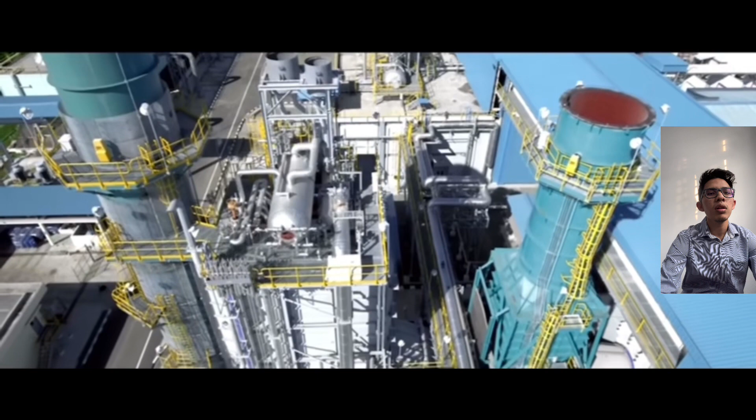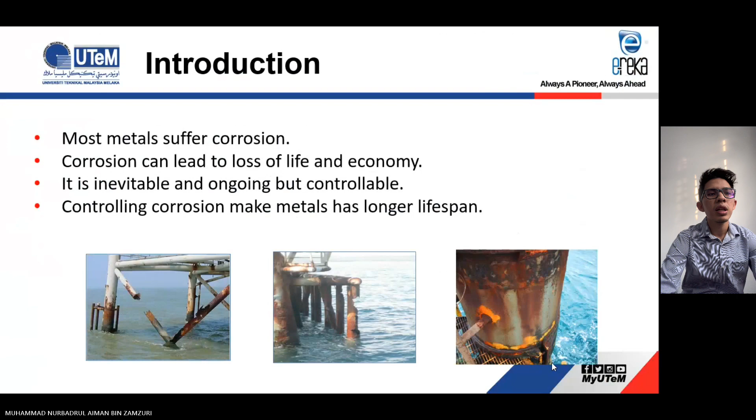At first, we will have a look on the introduction. Most metals suffer corrosion that can lead to loss of life and economy. It is inevitable and ongoing but controllable. By controlling corrosion, we can give metals a longer lifespan and reduce the loss.

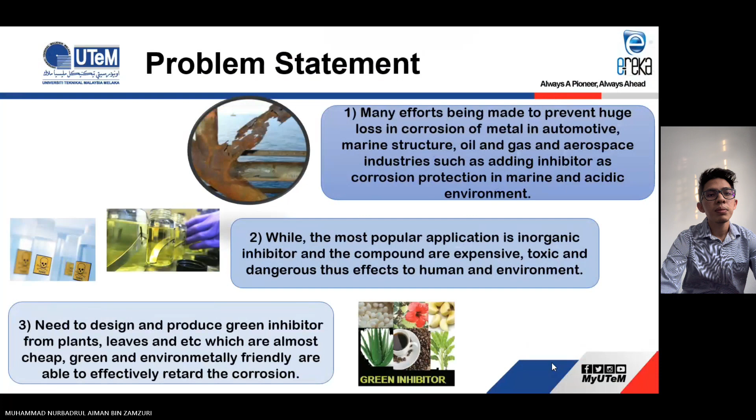These are the problem statements that led to the emergence of this innovation idea: many efforts are being made to prevent huge losses from corrosion of metals in automotive, marine structure, oil and gas, and aerospace industries, such as adding inhibitors as corrosion protection in marine and acidic environments. Besides, the most popular application is inorganic inhibitor, and the compounds are expensive, toxic, and dangerous, thus affecting human and environment. So we need to design and produce a green inhibitor from plants, leaves, or others, which are cheap, green, environmentally friendly, and able to effectively retard corrosion.

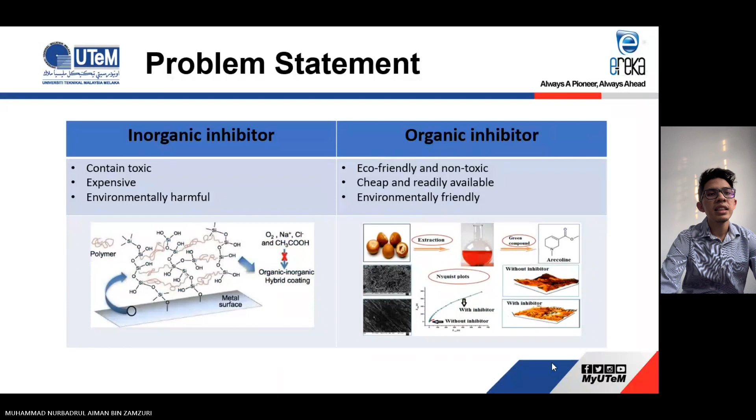These are the comparisons between inorganic inhibitor and organic inhibitor. The inorganic inhibitor contains toxic, expensive, and environmentally harmful elements, while organic inhibitor is an eco-friendly and non-toxic product. Moreover, it is cheap, readily available, and also environmentally friendly.

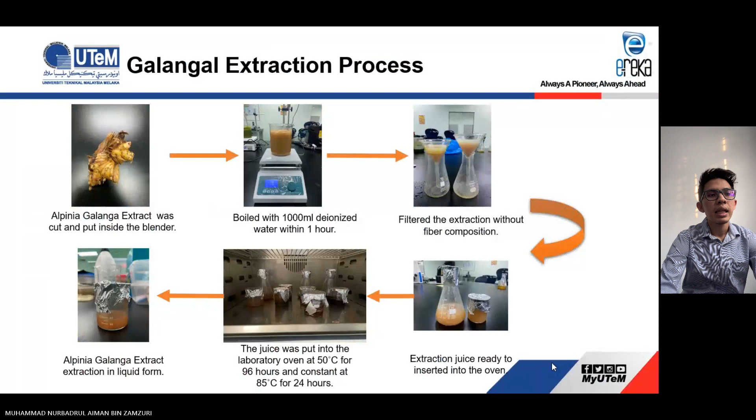For the extraction process, first the Alpinia Galanga extract was cut and put inside the blender. Then it was boiled with a liter of deionized water for an hour. After that, the extraction was filtered without composition before being inserted into the oven at 50 degrees Celsius for 96 hours, and constant at 85 degrees Celsius for 24 hours. At last, we obtain Alpinia Galanga extract in liquid form.

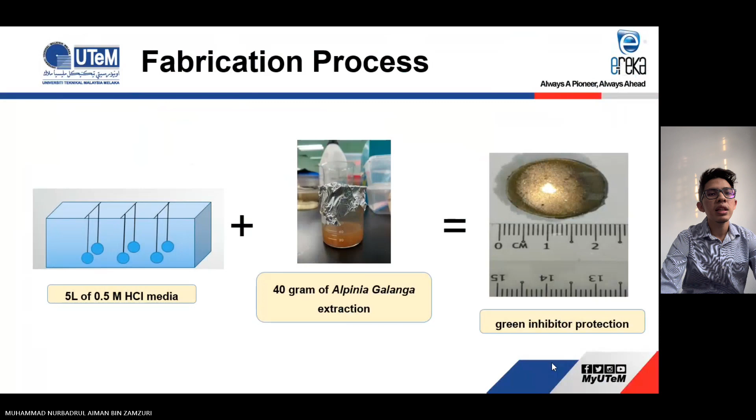For the fabrication process, to produce a layer of green inhibitor protection, 5 liters of 0.5 molar hydrochloric acid media is mixed with 40 grams of Alpinia Galanga extraction. This gives us a green inhibitor protection on the low carbon steel. Our product comes out with 3 novelties: green materials and safety, acting as a barrier coating, and corrosion behavior and cost.

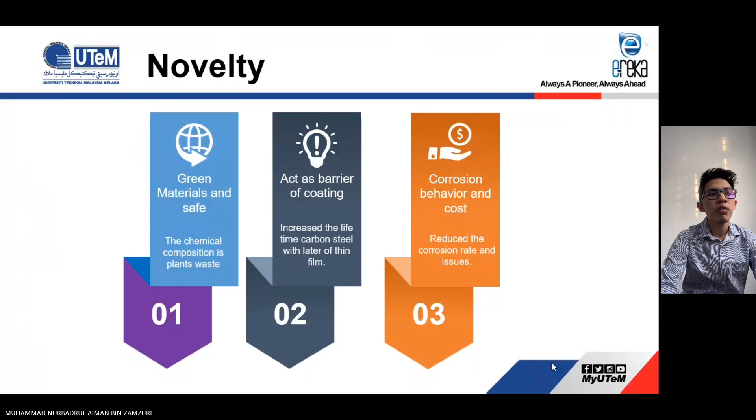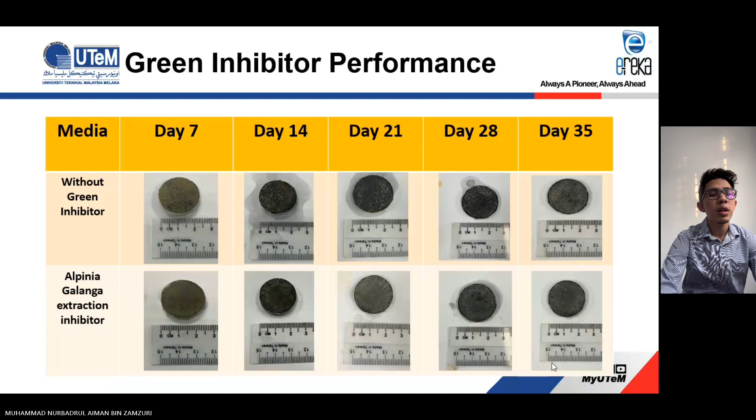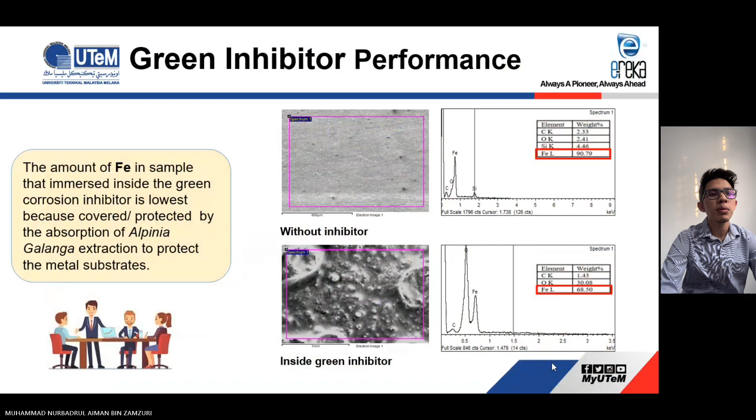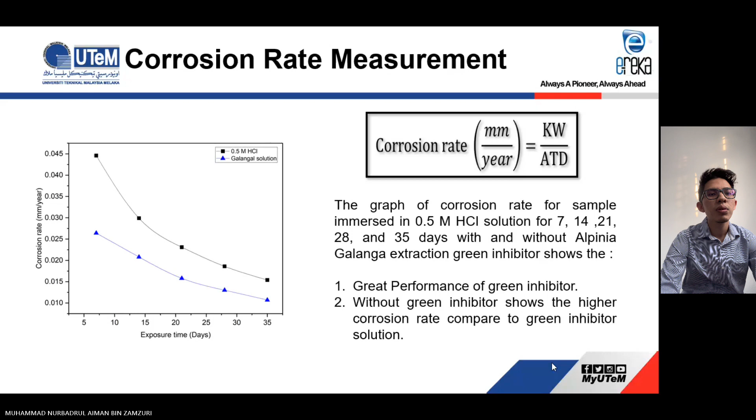Next, for the corrosion rate measurement, the obtained data shows great performance of the green inhibitor, while without inhibitor shows higher corrosion rate compared to the green inhibitor solution.

This infographic shows the evaluation of Alpinia Galanga extract as an eco-friendly corrosion inhibitor for carbon steel in 0.5 molar hydrochloric acid medium. At first, we turn the solid galanga into its solvent and extract. Then we run the FTIR analysis to get information on the chemical compound. Next, we run the immersion test to get comparison results in terms of weight loss measurement and corrosion rate measurement. At last, we run SEM and EDX analysis to do the surface study.

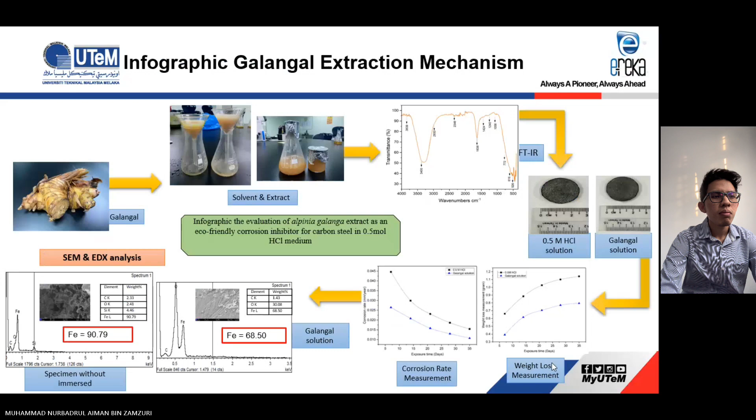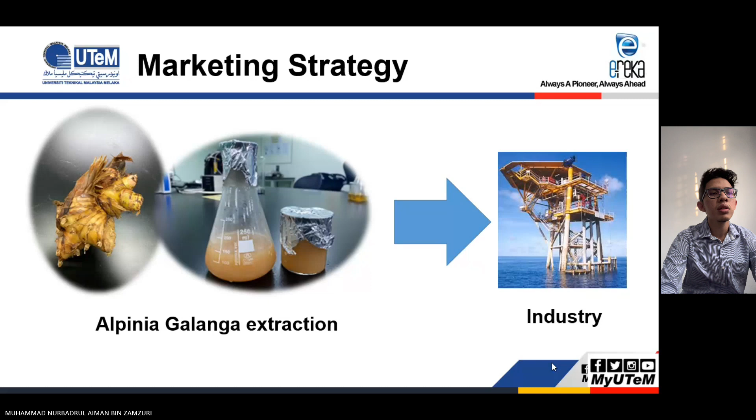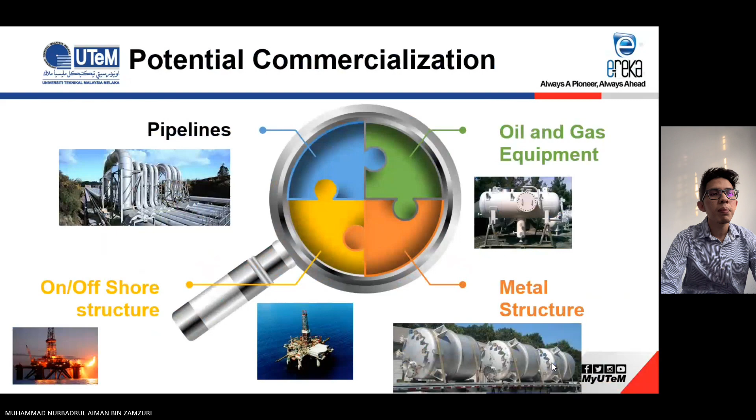For the marketing strategy, we have planned to bring the use of this green inhibitor to the industry by identifying potential commercialization. The potential commercialization of this Bahan Perencat Hijau, particularly in the oil and gas industry, covers pipelines, oil and gas equipment, onshore and offshore structures, and metal structures.

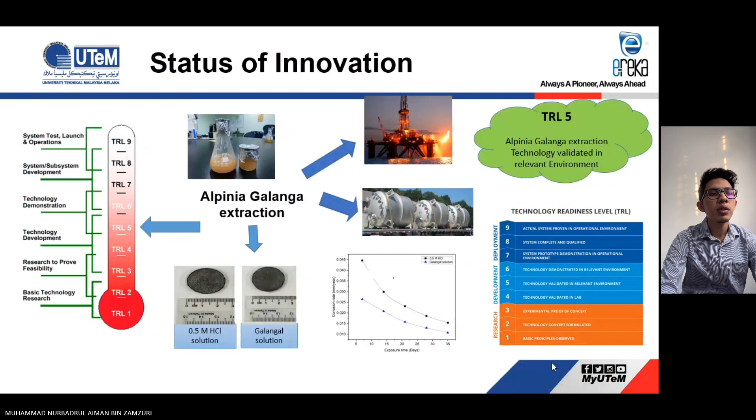For the status of innovation, Alpinia Galanga extraction, by referring to technology readiness level, is at TRL5, which validates it in the relevant environment.

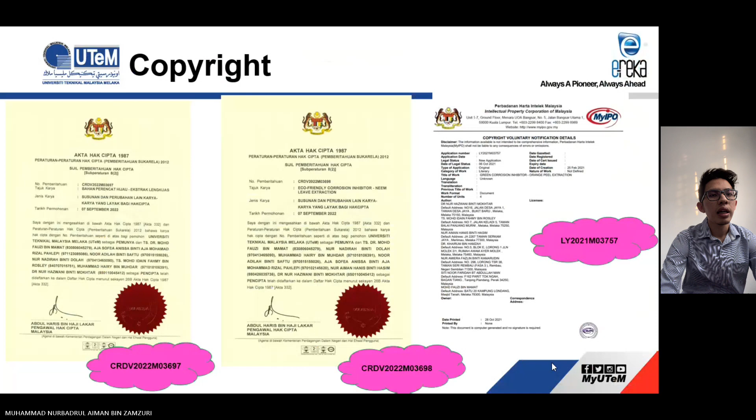As the conclusion of this Bahan Perencat Hijau presentation, we can conclude that Alpinia Galanga extraction shows good potential as a green corrosion inhibitor. Moreover, the amount of rust on the carbon steel coupon reduced as weight loss decreased. The coupon coated with Alpinia Galanga extraction showed lower corrosion rate compared to the coupon without inhibitor.